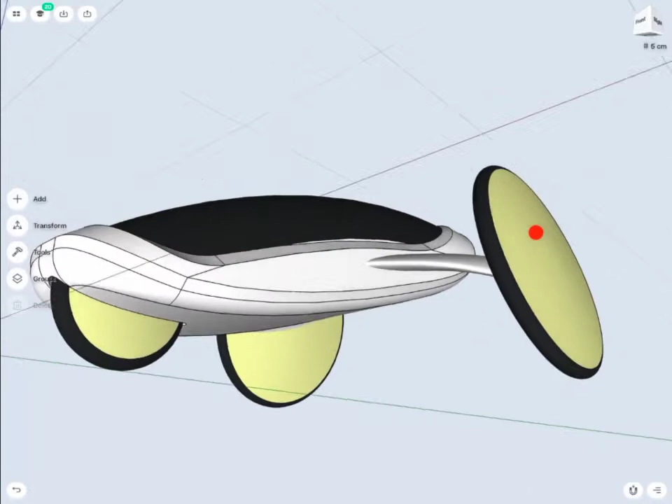In this tutorial we're going to build a tricycle in a conceptual way. We'll learn how to make a sketch, extrude the sketch, use the union command, extraction, filleting and chamfering, and also how to use the transformation tool in this project.

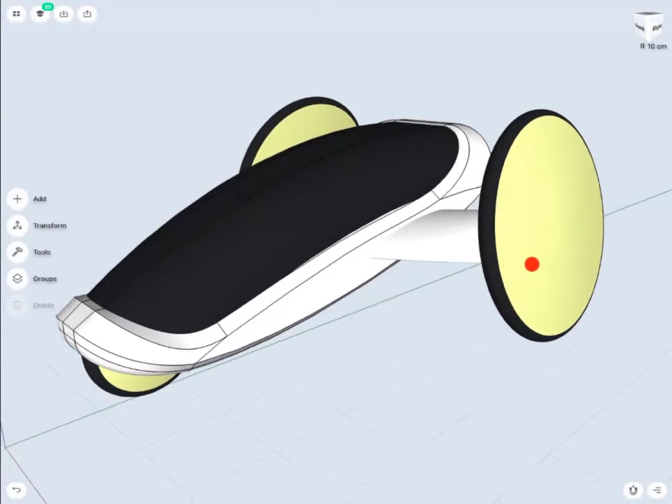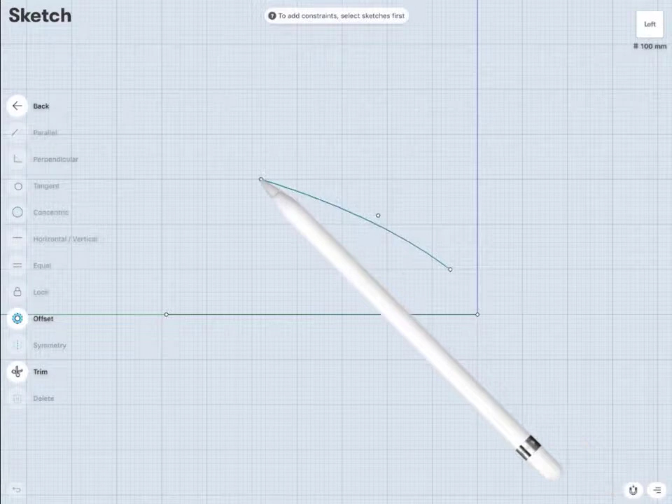So let's start. After you create a new workspace, set up the left view, and then we're going to make a sketch of profiles. I'm going to make the profile of the body and also the profile of the wheels, and use those profiles to catch the general shape of the design. According to that I'm going to fit my objects. Sketches might help you make objects, but they might also suggest a shape you can base on.

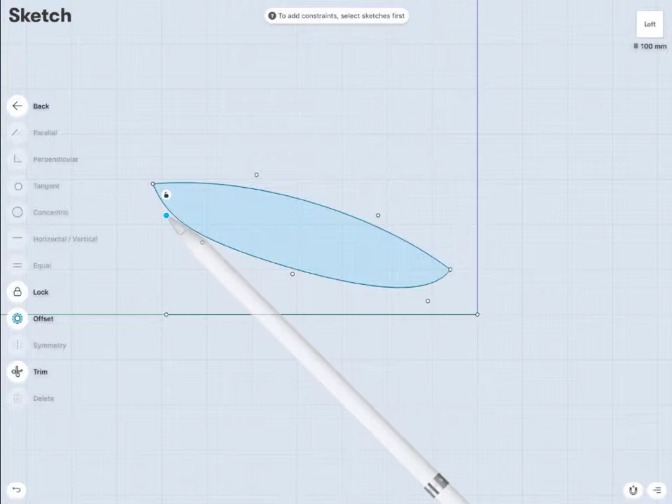I'm creating the body shape right now, moving the points according to the idea I've got in my head.

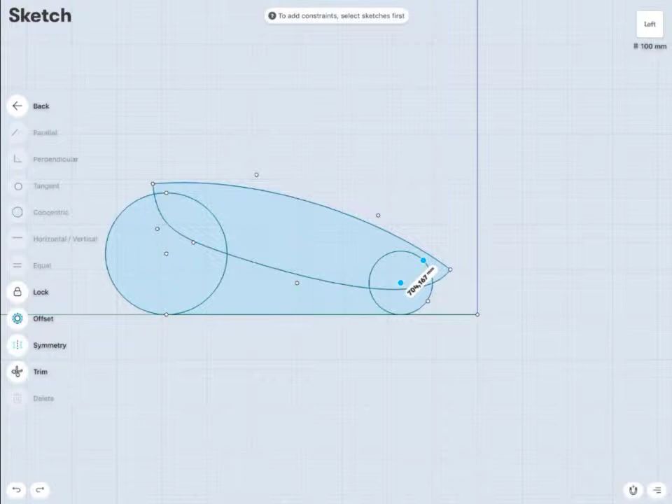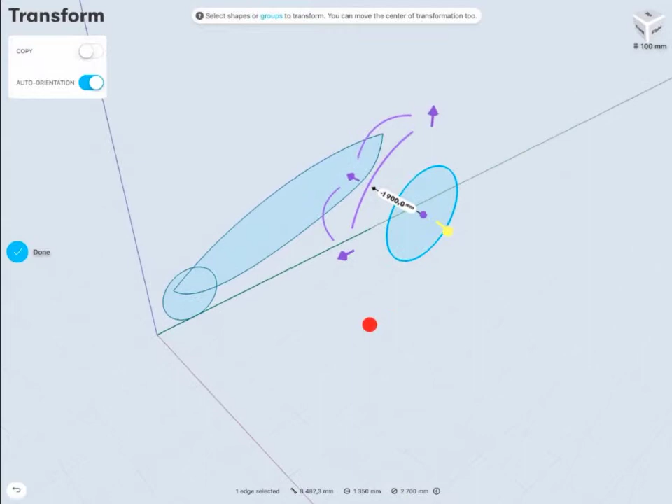Now it's time for the wheels. Always remember, if you place your sketch, you can move it wherever you want. You just need to pick up one point, two points, or as many points as you like, and drag and drop it with your Apple Pencil. Now I'm going to move the center point, and move the circle because this is where my wheel is going to be. I might change it later, but it gives me a rough idea how my tricycle is going to look.

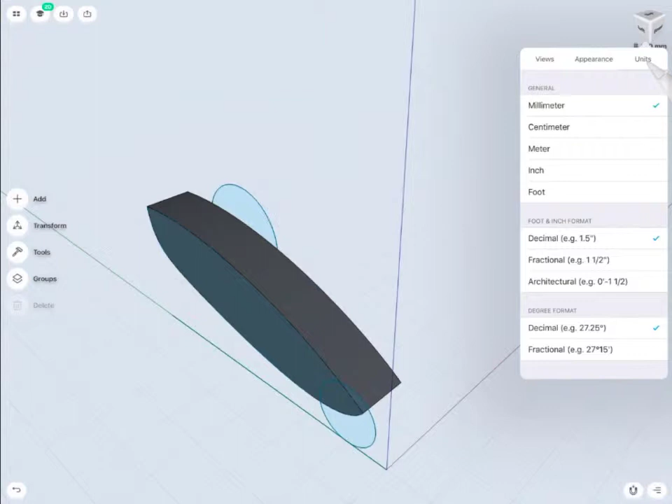So I'll select the area I want to extrude and just pull with my pencil. I see my units are millimeters, so this object is big, so I'm going to change units to centimeters.

Now I need to hide the sketches because they're in the way of extruding the body I've created. So I just select the face of the body and pull with the pencil according to the size I want. Okay, now I can unhide my sketch.

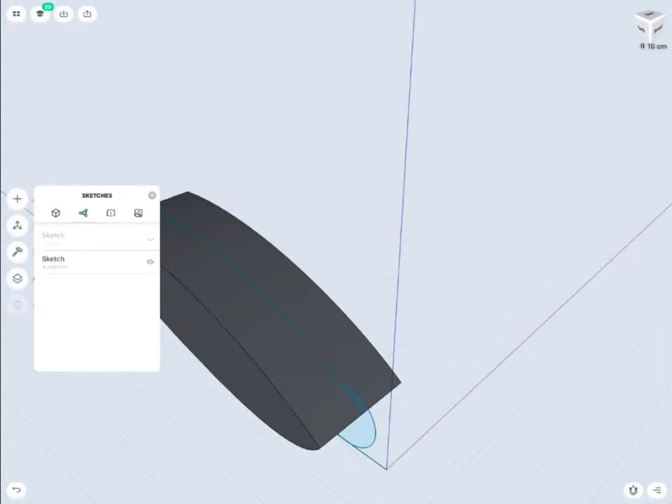I decided to make it a little bit bigger because I'm going to make the sides of my tricycle a little bit curvy, so I have to make special shapes to cut it off. So I have to prepare for this.

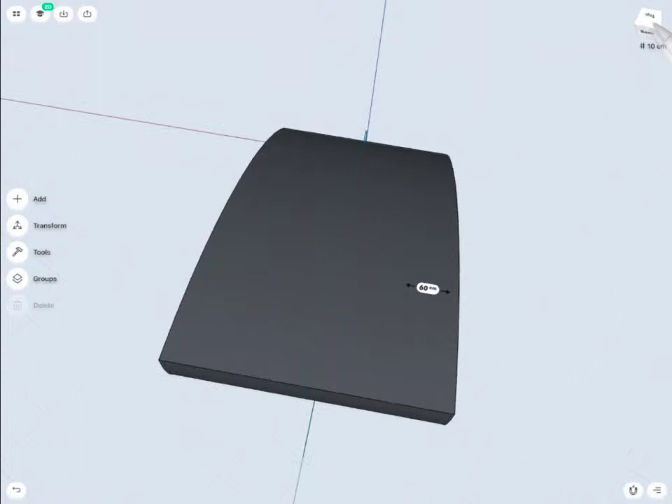Now it's time to go to top view, and I'm going to create the sketch to cut the side of my tricycle body. Be sure to create a loop curve, then you can use it as a tool to subtract from your body after you extrude.

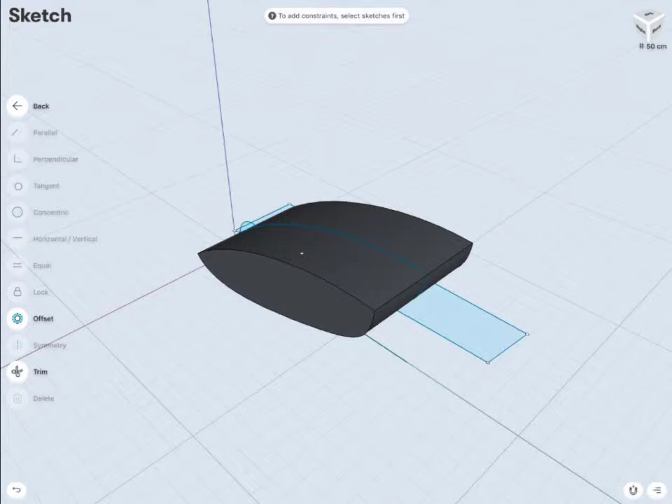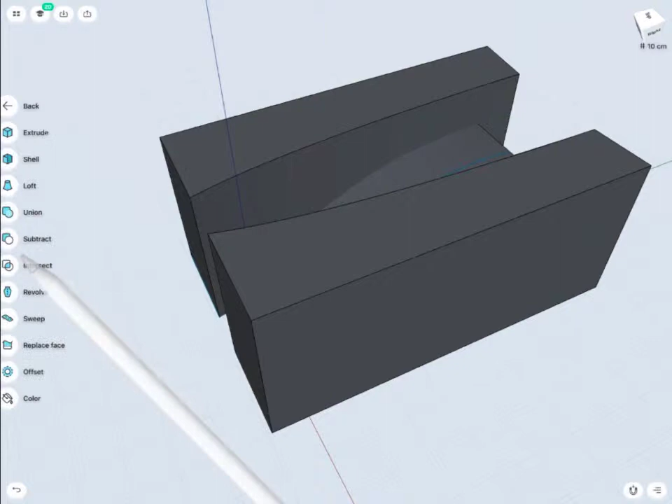Now I have to pull it up to make it a body, and I'm going to mirror that body on the other side, with the center of the mirror being the sketch I'm using as the sketch of my body. And now I'm going to subtract — first select the object you want to subtract in, then the objects you're subtracting with.

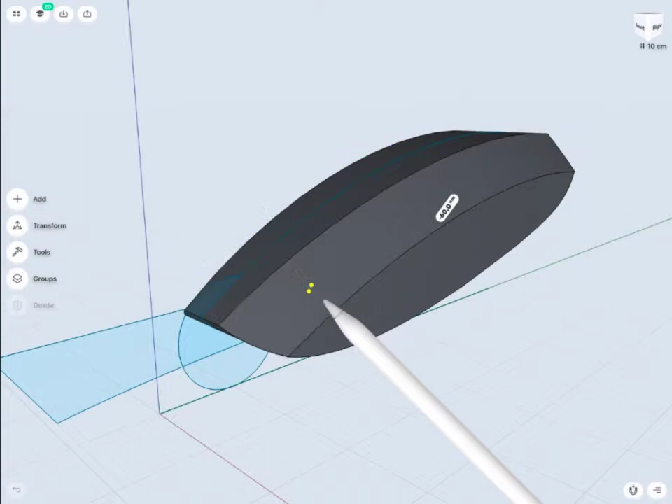Now it's time to make some nice smooth shapes. First I'm going to make a window — this is going to be the profile of the fillet.

I'm choosing 60, but you can customize yours by your preferences. Then I need to copy that object because I'm going to use it again to make the window inside, like a bevel.

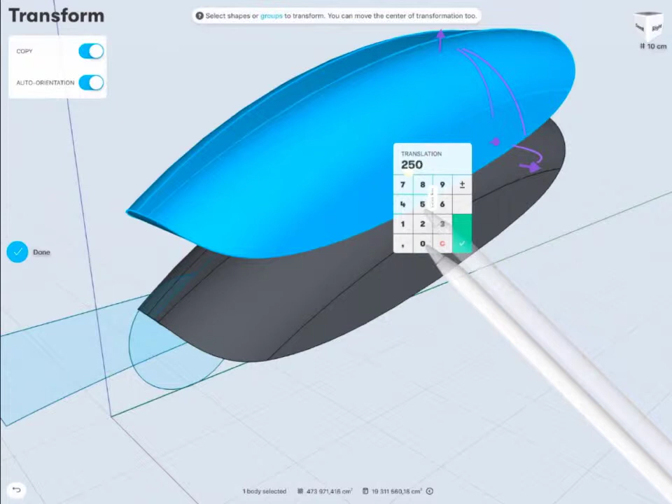Now I'm going to create the curve loop, which will help me cut and make the place for the window.

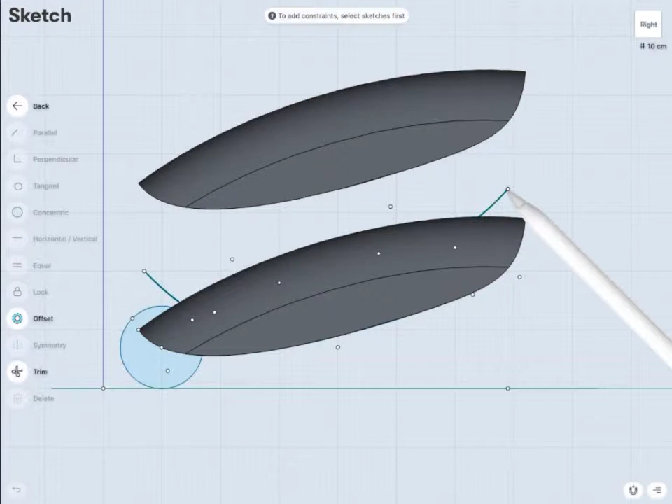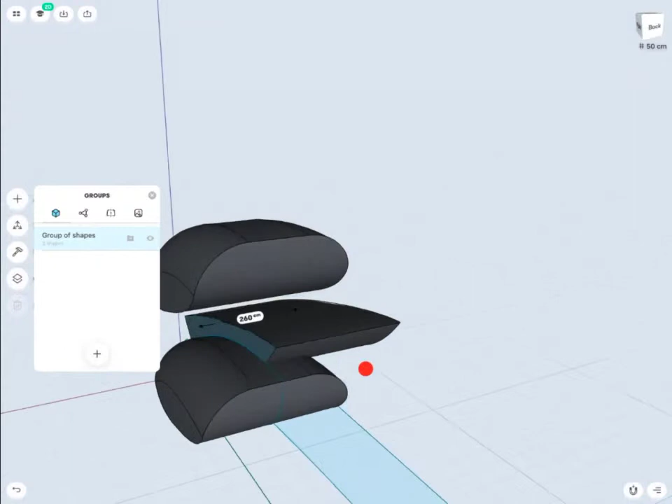I'm going to hide my bodies right now to reach my profile, and I'm going to extrude it. I also need to create another layer to place the body in, so later I can easily make a subtraction and better organize the design I'm doing.

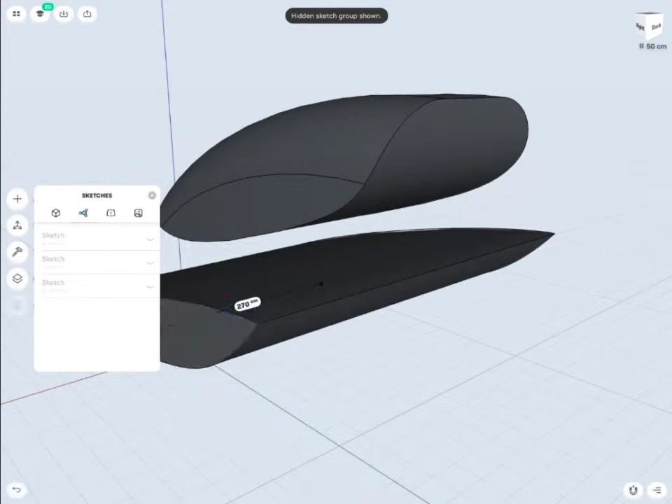I'll temporarily hide the sketches to extrude my cutting object. Let's unhide the body, and I'm going to check if the window hole is the size I want it to be according to the size of the body. I think it's alright — let's just move it a little bit down.

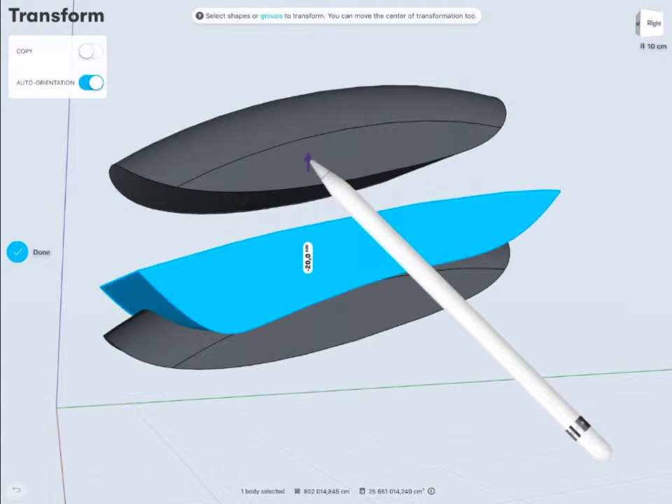Okay, now it's better. Now I'm going to use a subtraction tool to make a window hole.

Now I have to select the body I've copied. I have to move this exactly the same amount of centimeters down, back to my body, so they need to be intersected.

I'm going to scale that window body, but first I need to relocate the transformation tool. As I did right now, I put it in the middle of the edge, and then I'm going to rescale according to that edge, so that allows me to make the center of my scaling, as you can see right now.

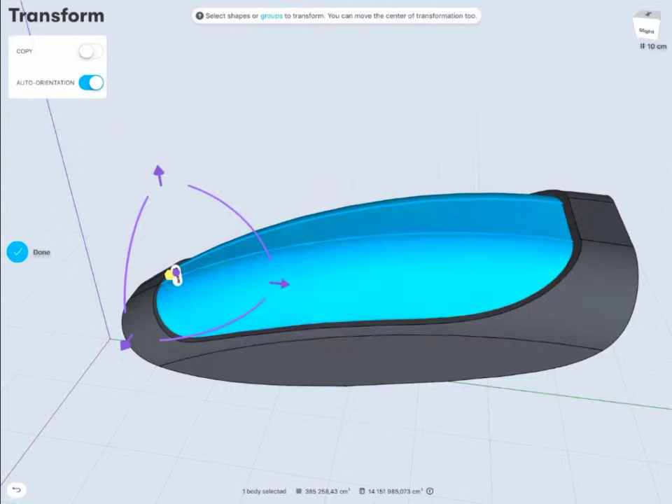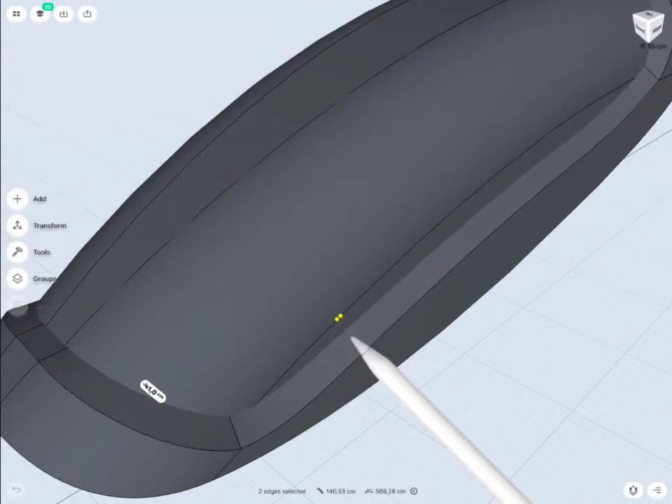So we've created a small step that will give more reality to that design. Now I'm going to make a chamfer at the edge of the body to make it even more realistic. This is kind of a trick to make it look really great.

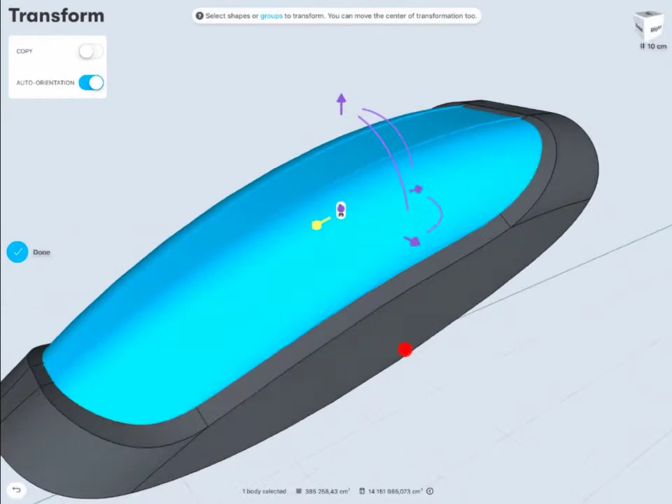And I think if it's ready, now I can make a union of those two objects, so this is going to be one body. A little bit of adjustment, and I think it's okay right now. I can make a union.

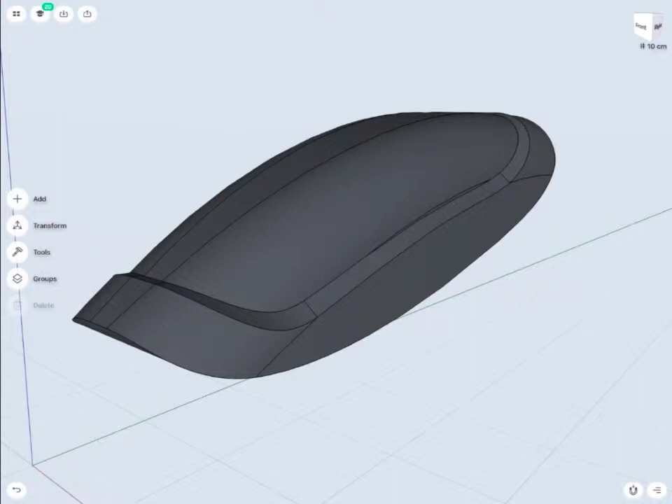I think it looks great. I might do a little bit more chamfering from the bottom — let's try. Remember, this is conceptual work, so you can improvise if you like.

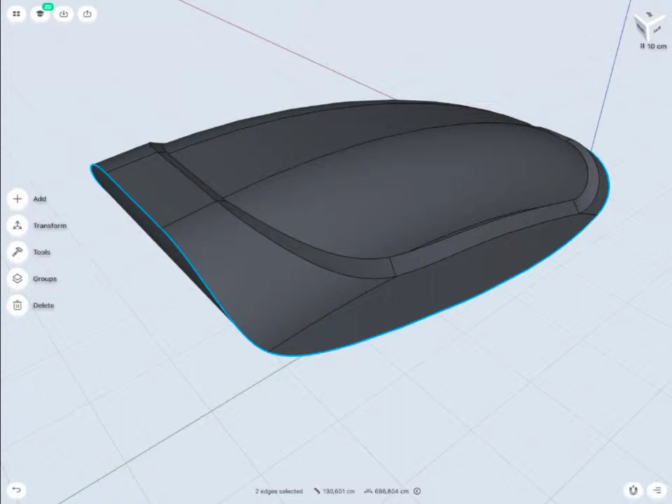Shapr3D gives you that ability to be creative in your own way, but you just need to work out with the tools a little bit and get to know how to use them.

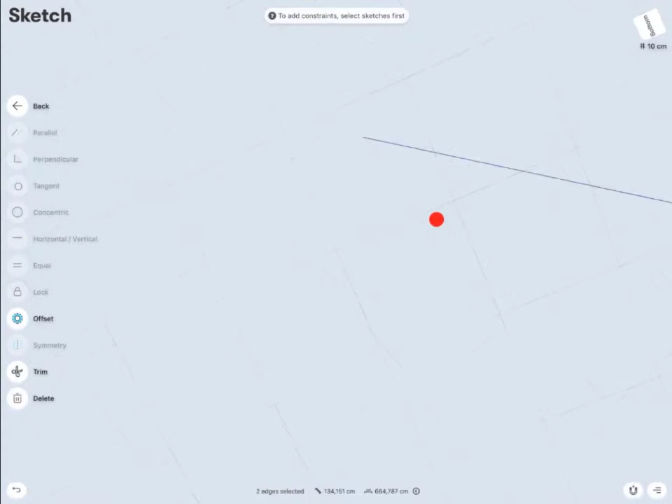So let's do some more. I'll do the fillet here — let's see how it looks. All right.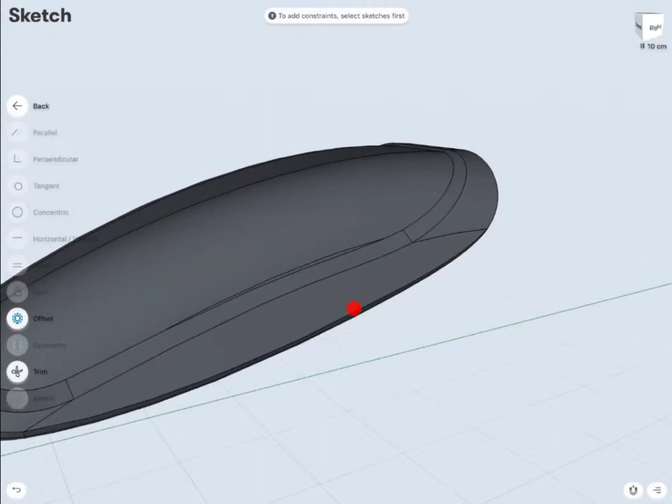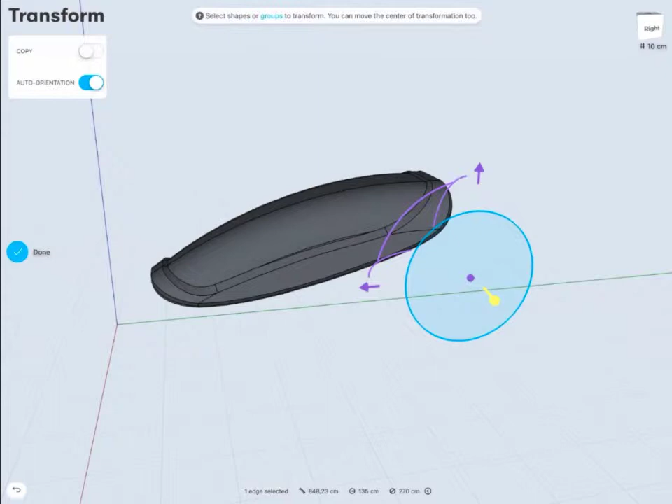Let's find the sketch of the back wheel. Now we're going to create a wheel shape, and we are going to create a wing between the body and the wheel. This is going to be a kind of smooth bridge between the body and the wheel.

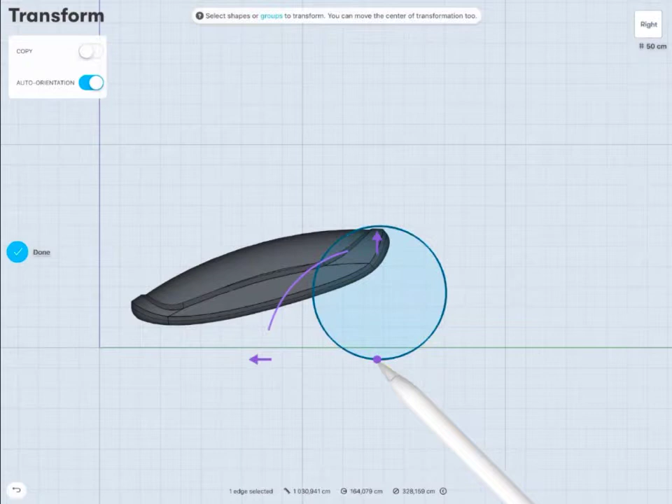I need to find the right position of my wheel. That's why I've created this sketch, to use it right now to visualize the future design. Now I'll go to side view and locate my transformation point. If the axis is a ground, I can align to that point. It looks great for me. Let's see later how it looks.

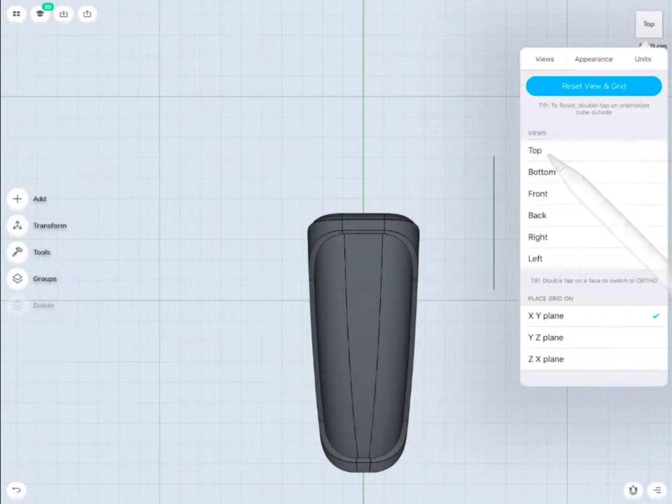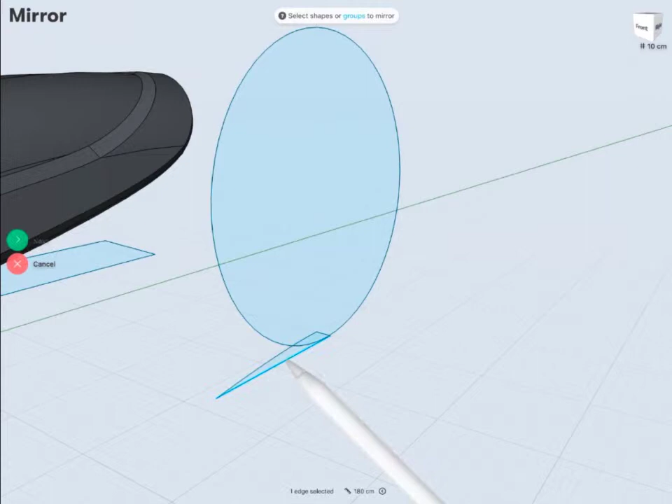From a top view, I'm going to create the profile of my wheel. I'm going to create a very edgy shape, and I can easily mirror that shape as long as this is a loop. This shape needs to be mirrored, so I'll select it and use one of these edges, the middle edge, as a mirror line, a symmetry line. At the end I'm going to trim that line because I don't need it in the future.

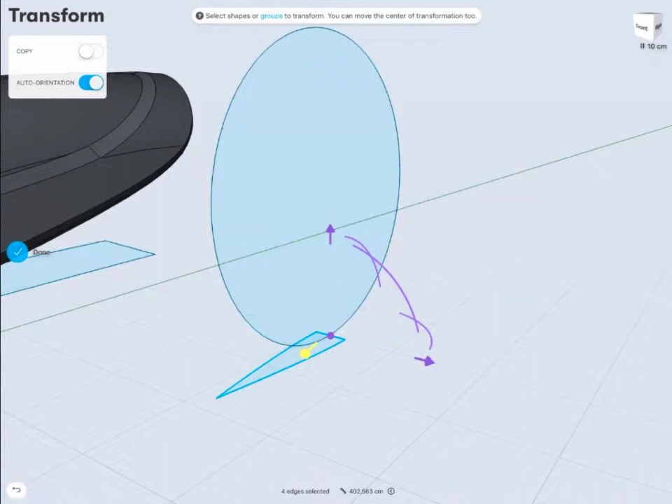Now I need to move that shape kind of to the center of my wheel. It doesn't have to be in the center. I can rescale it and fit it into my shape proportions.

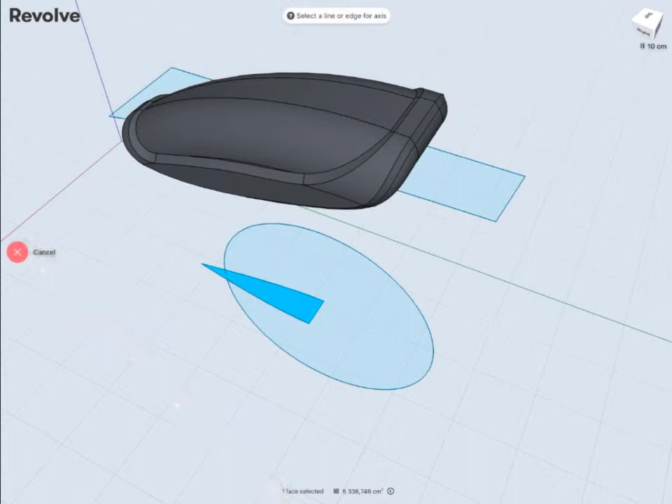Now it's time to make a revolve out of that profile. Let's select the command revolve, find the profile, and find the edge of revolving, as I did right now. If you launch any command, remember what the software tells you to do. That's very easy to find out.

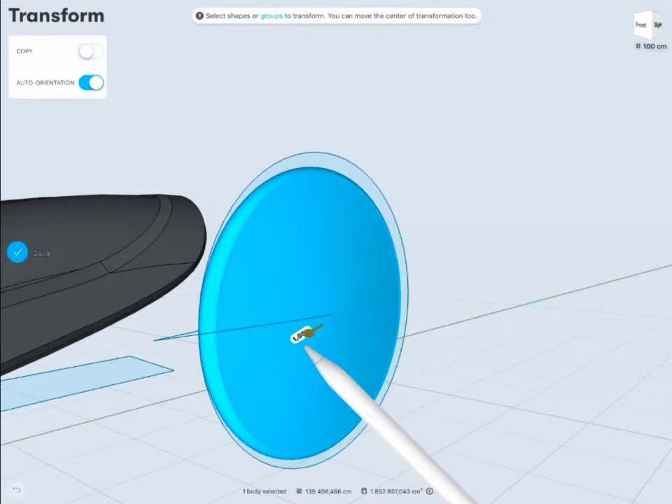I have filleted the edge, so now I'm going to scale my wheel and check out if anything is okay with the shape as it is right now. Again, I'm going to relocate my transformation tool and rescale according to that point.

And I'm going to use the rotate tool to rotate the wheel a little bit to make it look like it is opposing the centrifugal force.

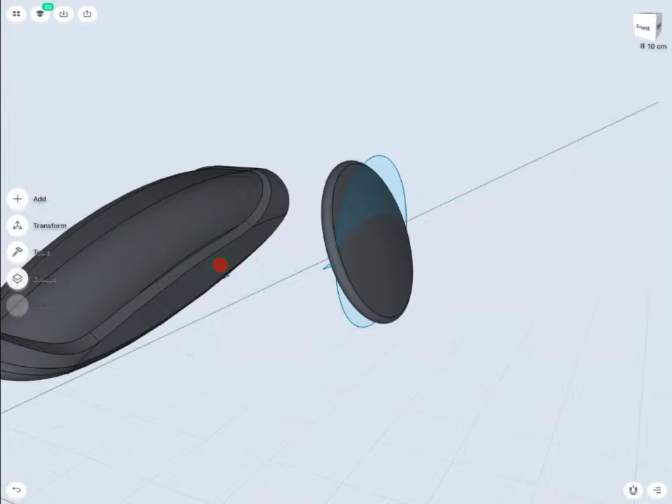Okay, it's time to make a wing, so I will select the surface I'm going to sketch on and double tap on that, so I can sketch straight on that surface. Basically what I need to do is just make profiles to create a loft. I'll create one — you can work with the profile to get the right shape you want.

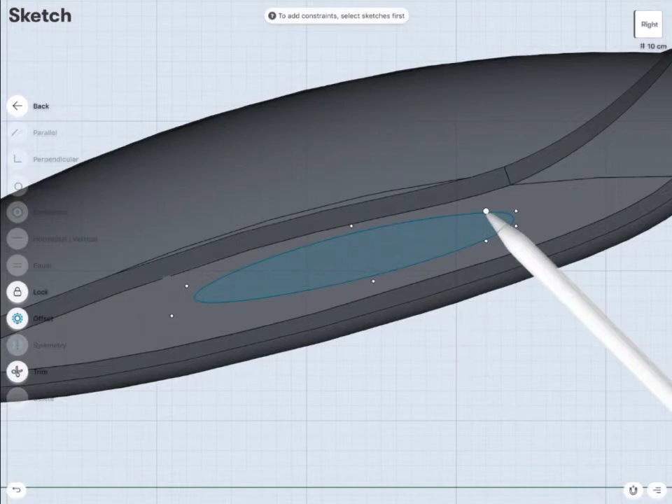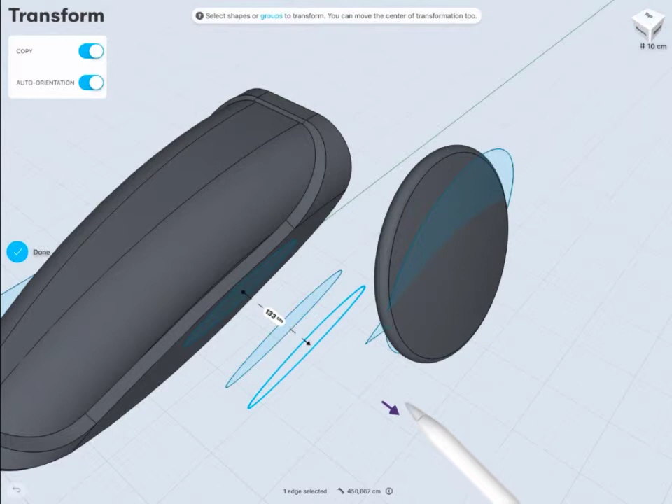Then I'm going to copy that profile using the transformation tool. Let's just make a copy by transform. Remember to select the copy option from the top left corner box, and also unselect when you don't need it. Now you can place the shapes wherever you like, and as you see, you can relocate the transformation point, and it will help you organize them as you move your sketches.

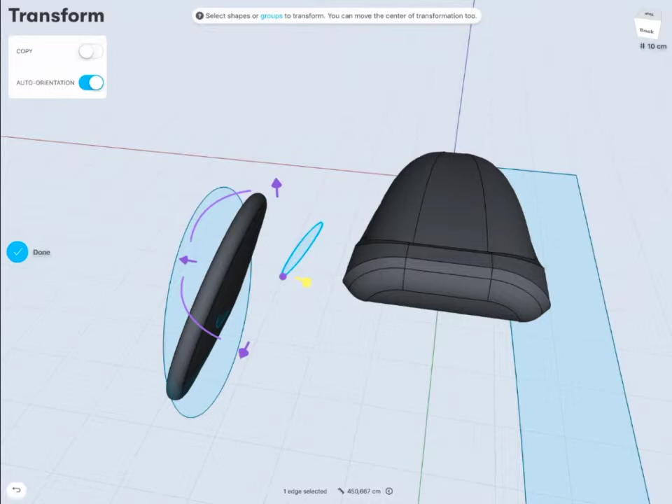When you are sure the sketches are placed in the right position, you can go straight to the loft command and select the sketches one by another. Okay, looks great.

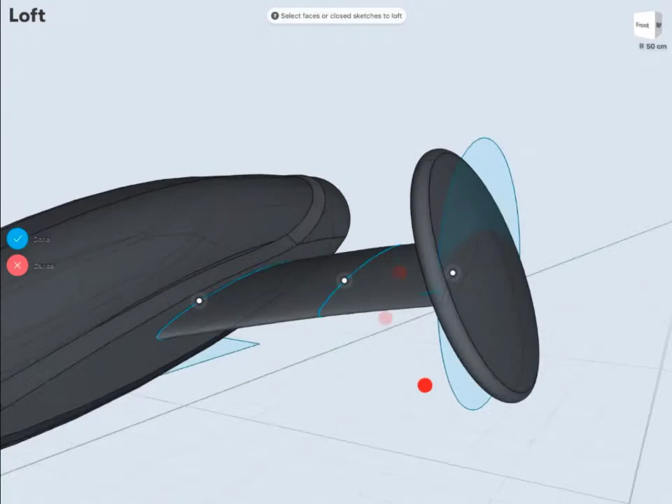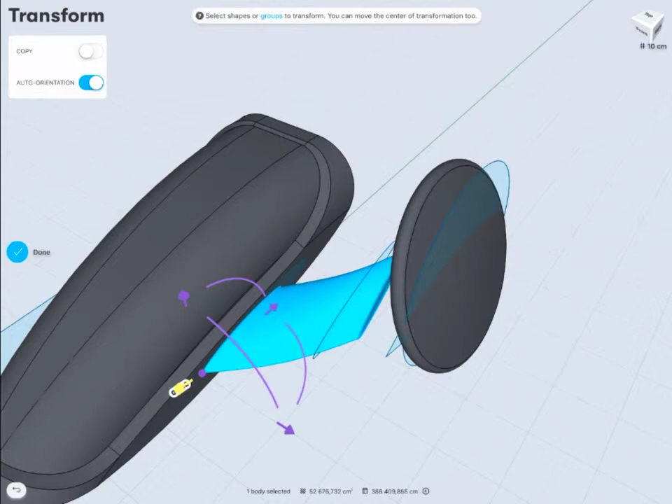I think the wing is a little bit too big, so I'm going to scale it a little bit. Again, I'm going to relocate the transformation point, and according to that, my design is scaled.

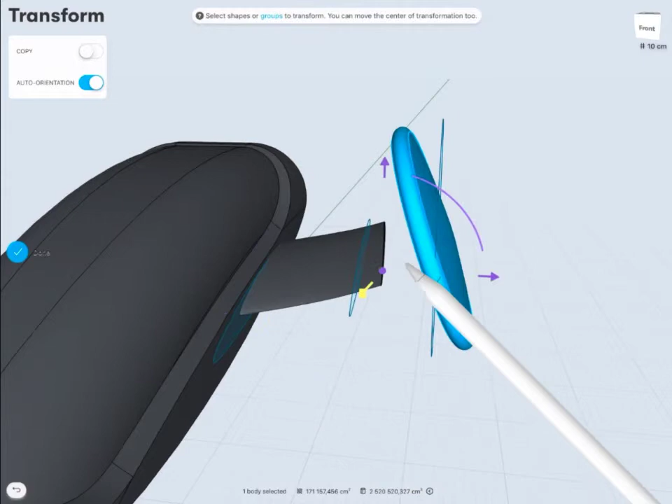Conceptual creating is very unique because only when objects are on a stage do you see the proportions. So you actually need to adjust all your objects on the stage again. That's why relocating the transformation point allows you, in the future, to snap to center or to certain objects you want to have it snapped to.

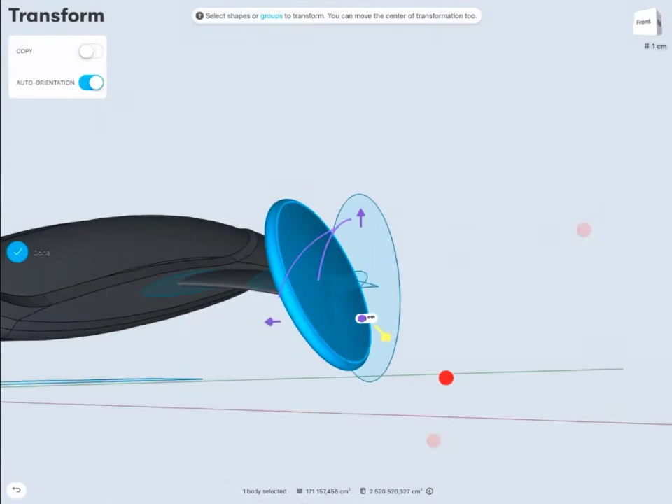A little bit more adjustment, and I think we can copy that wheel with a wing on the other side of my body.

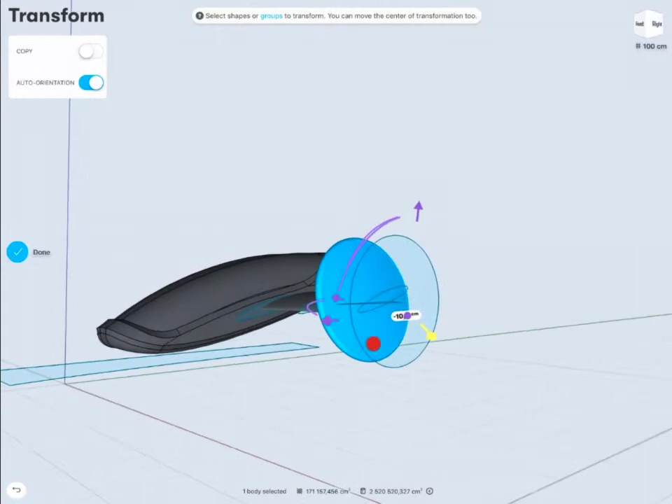To do the mirror, I need to have a sketch which is placed on the axis at the center of my object. So I've got it. Now I just need to select the object and mirror according to that sketch.

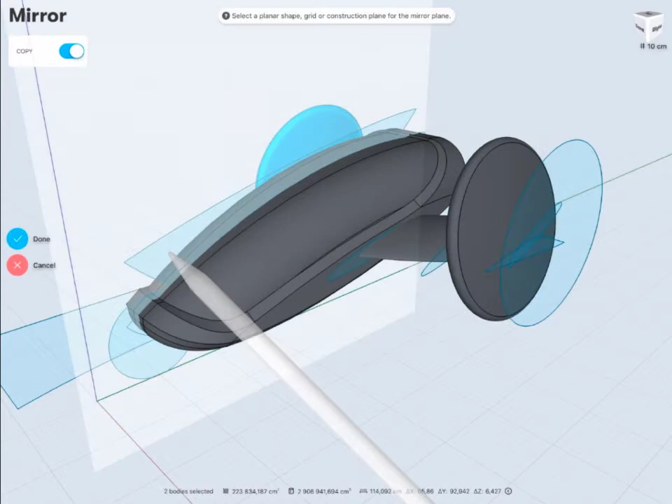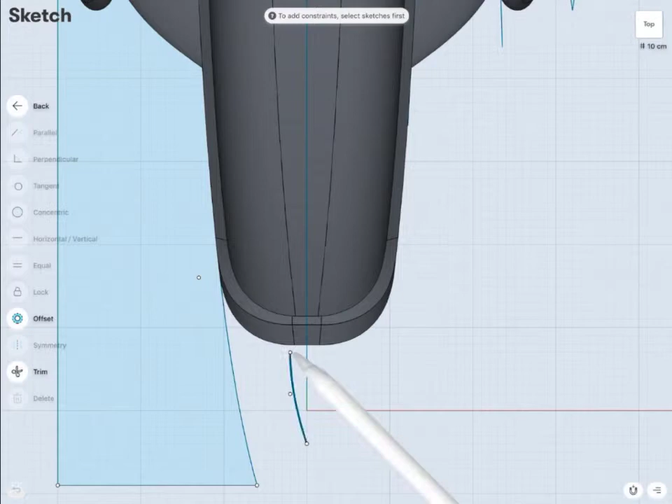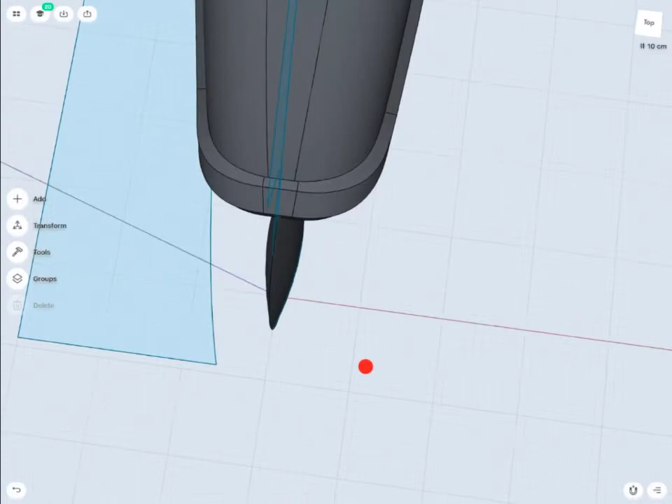Let's go to the top view, and then we're going to create a profile to make the wheel, so the same method as I did with the big wheel. And I'm going to smooth the edge by using the fillet.

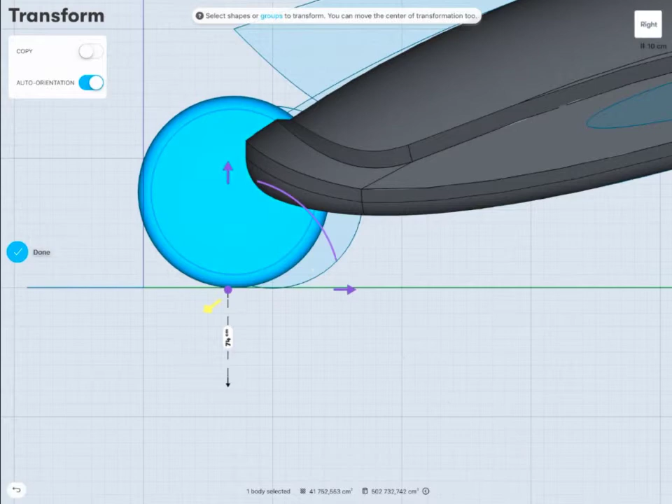And I'm going to copy this object again, as I did with the body, because I need that to make a fender — it's a kind of small shell in the body to protect from the dirt. So first I'm going to find the right position for this.

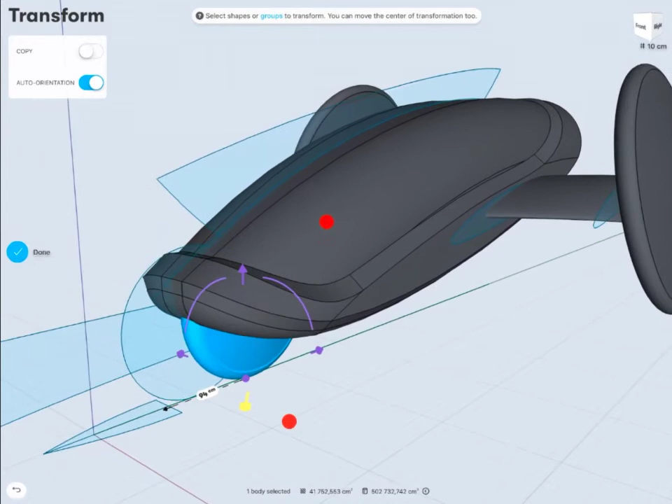And I'm going to make a copy by using a transform tool with the copy option selected. Be sure to remember the certain distance you are moving, because otherwise it won't fit the same place.

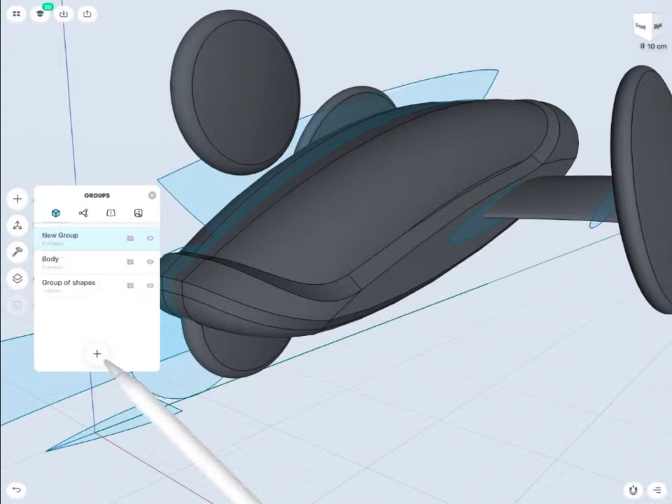I'm going to place my original wheel on a layer, so it won't disturb me when I'm going to make a fender by cutting.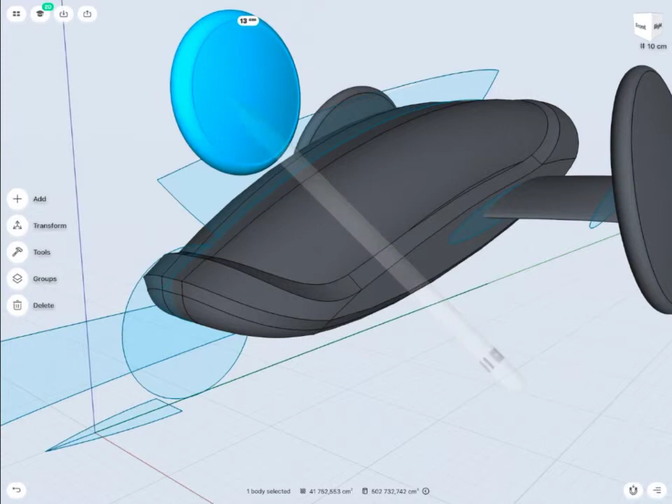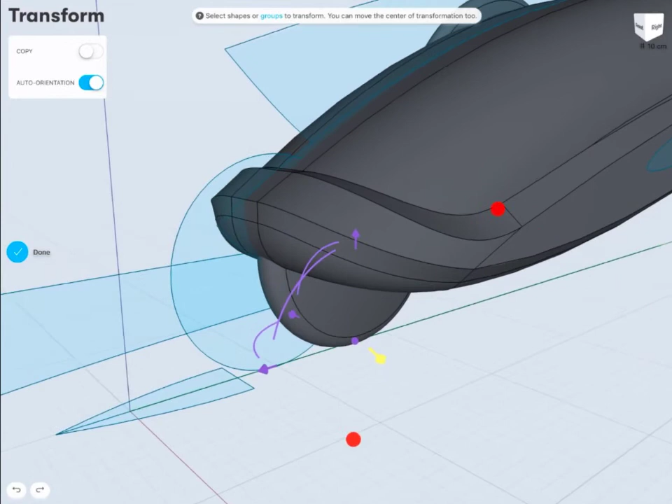I think I need to relocate my transformation point. I first set it up in the middle and then move it towards the wheel. It needs to be just a little bit bigger for the wheel to move.

Now it's just a visual effect, because we're not going to produce that, of course, but anyway, details do the job. Sometimes it's worth it to look and care about details.

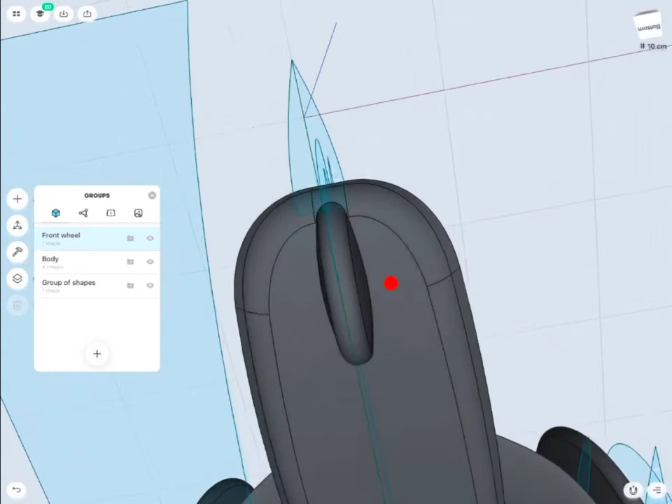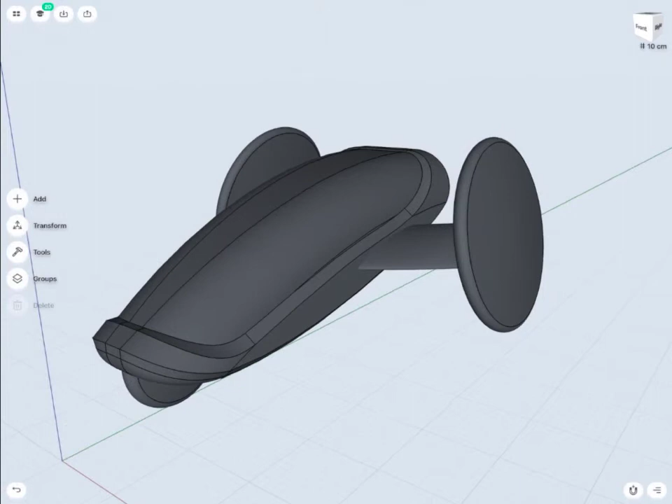I think we've done quite a great job. Now I need to hide all of the sketches I've got on the stage, and we go straight to make colors.

Make your own composition of colors you like. I like white and pure.

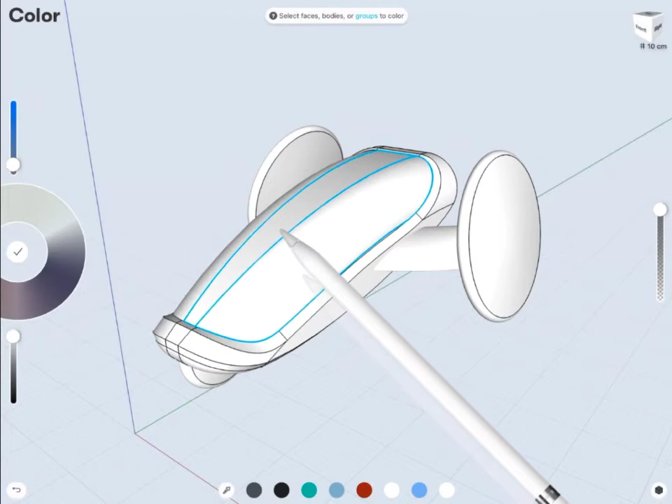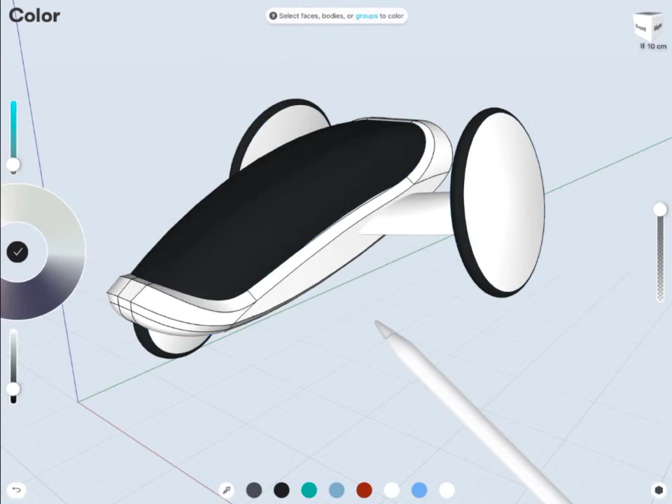We've actually gone through quite a lot of things. I like this designing, this kind of conceptual method. If you get really good with all of these tools that Shapr3D offers, you can really create great designs and really have fun with modeling. That's what I'm doing, actually.